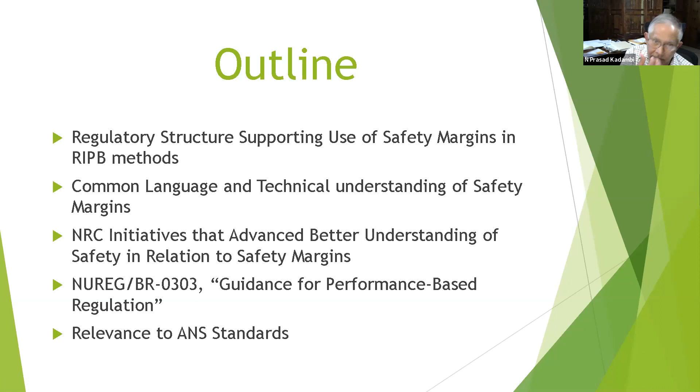So this slide essentially was presented by Stu Magruder of NRC staff, who made the community of practice presentation last month in April. And he offered this in the context of how the staff reviews applications for advanced reactor licensing, and how they use the RIPB methods, and what in the regulation makes that possible.

This excerpt clearly describes what NRC will be looking for in an application within the licensing process. Stu highlighted the need to include determination of margins of safety as a technology inclusive factor for evaluating applications. Now, 10 CFR 50.34(a) applies to PSARs, and therefore it can be seen as a minimum set of technical information to be provided in an application.

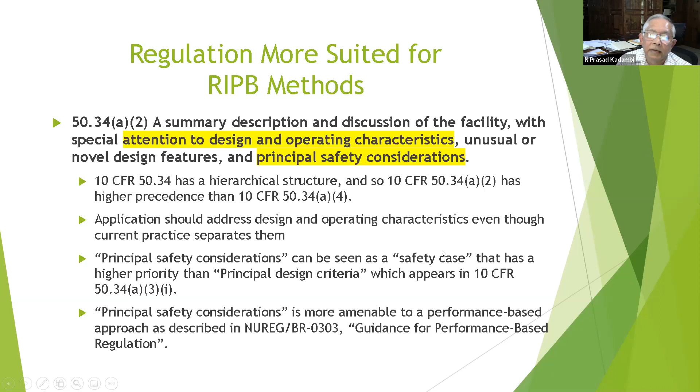So in terms of what does a designer do, the performance expectations associated with the design, I would expect that the designer will want to address the key regulatory expectations. And those would be based on analysis and evaluation of the design. And that includes functional analysis that covers design and operational phases. It would be based on modeling and simulation quite a bit.

The performance relative to risk would have to be considered. And these days, the way I look at it is that design and operation are to be considered in a continuum. But finally, we end up with being able to identify and determine the margins of safety. Next slide.

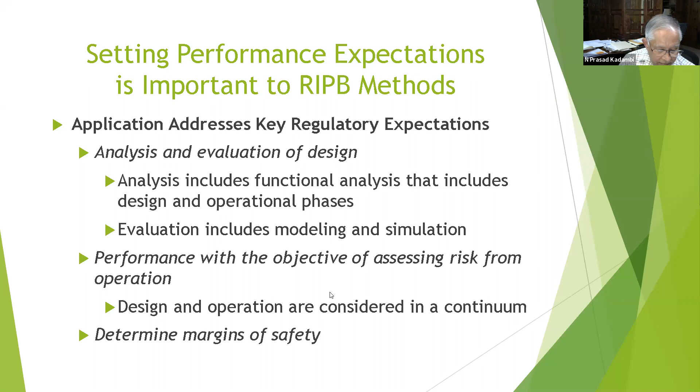So I'd like to spend a bit of time looking at the concepts of safety margin and margins in general. The common language understanding, the easiest to go to, would probably be profit margins, which are a difference between the sale price and the cost of manufacture. But as we all know, these things start off simple, but can become very complicated quickly.

For example, if you think about the posted speed limit on our roads, it's generally posted at about 55 miles an hour. But if you're traveling at 56 or 57, would you really get penalized for it? Highly unlikely. But what is involved is that there is a margin for enforcement of the speed limit. And generally these days, that's about 10 miles an hour. So if you go at 65 miles an hour, you can expect to get a ticket.

Similarly, it can get complicated if you don't consider margins and look at an issue that is frequently faced, especially in the past when the regulatory regime was more strictly compliance oriented: strict compliance with a requirement versus conformance with performance objectives.

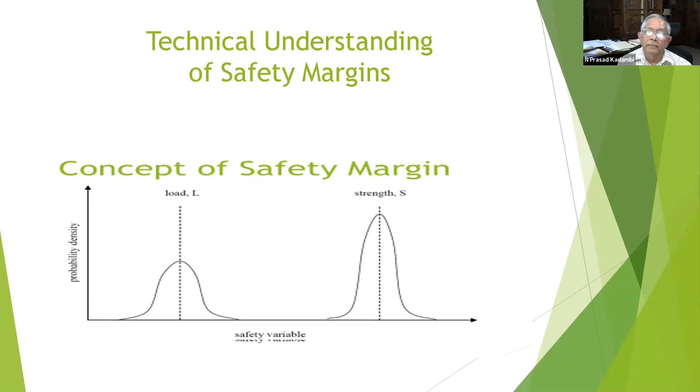If we look at the sort of issues that we face in the ANS standards, what we find is we're looking at, for example, things like reactor transients, in which there is an initiating event, and there's a trajectory for the transient, and what we are concerned about is what happens at the extreme points of the transient.

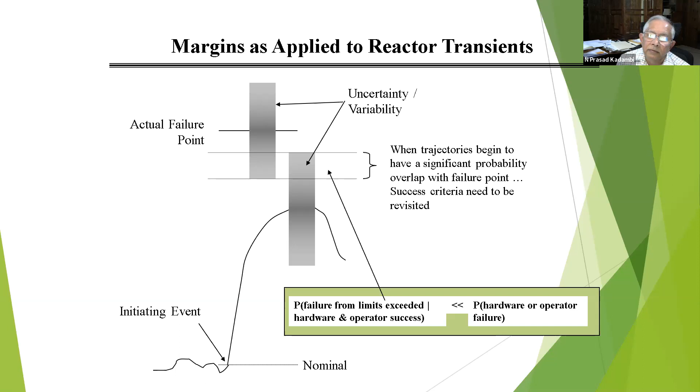And in this picture, what is shown is there's a probability distribution related to the variables in the transient. And of course, in terms of the margin, that probability distribution needs to be compared with a probability distribution associated with the failure. And it has to include consideration of the uncertainty and the variability of the parameters involved. So this is the sort of thing that makes margins quite complicated in some of the work that we do. Next slide.

So, a more sophisticated way of depicting margins was developed as part of the research that we did in the performance-based approaches area. I want to give credit to Bob Youngblood, who has worked with me over many years, and whose work I use liberally in this presentation also.

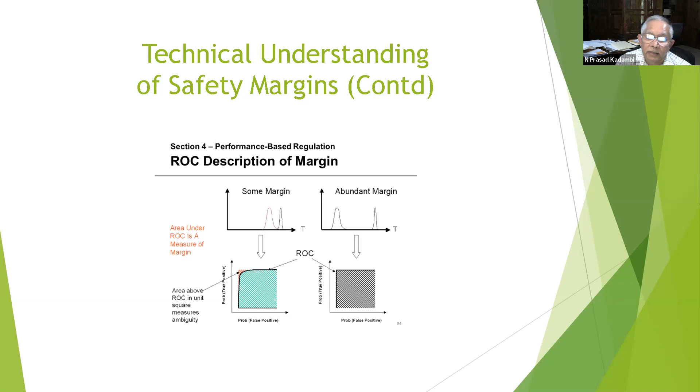He and I worked on this concept of the receiver operating characteristics, which is a way to show how decisions are made under uncertainty, but also ambiguity. So this is how practical decisions have to be made, where you have to consider margins. And this technique allows you to just pictorially represent where you have abundant margin and where you might just have some margin, but you don't know whether that's enough for what needs to be done. So that's where the evaluation comes in. Next slide.

Now, this is getting a little more into the details of how margins can be quite significant in the work that is done in reactor safety. This shows that there are conditions where the level of detail in the consideration of margins can become really quite significant. This picture depicts a set of events related to the large break LOCA that goes into the recirculation phase. And it's something that's associated with what has been called the generic issue 191 on debris accumulation.

The yellow part, the design basis, is where adequate cooling in the recirculation mode occurs. Now, in terms of how the modeling is used, it's the area where, related to margins, you would rigorously validate the margins. But if you start considering lower frequencies of the sequence, where you think about plugging and get into the beyond design basis region of the sequence, then it's just not practical to validate the models. So you have to deal with the fact that the margins you may be able to estimate, but you probably will have less confidence in the magnitude of the margin.

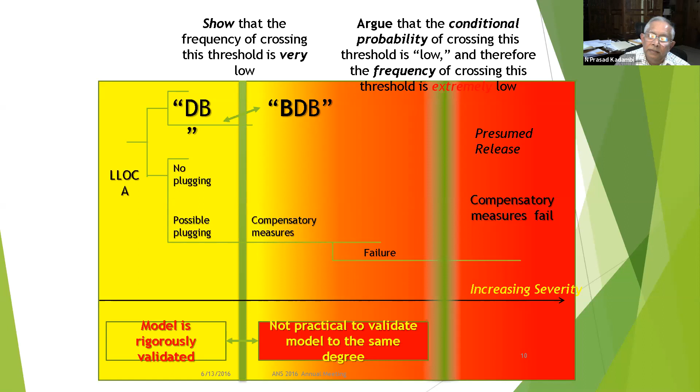So if you're able to determine the margins in a satisfactory way, then what becomes possible is that you have the possibility of a sort of negotiating between the allocation of margins for different uses. So this is where when people say that there should be flexibility in the regulatory regime, you're really talking about how the margins are allocated in such a way that the licensee has the ability to use the margin for their purposes, as much as the regulator has the need to use the margin to make sure that safety limits will be observed.

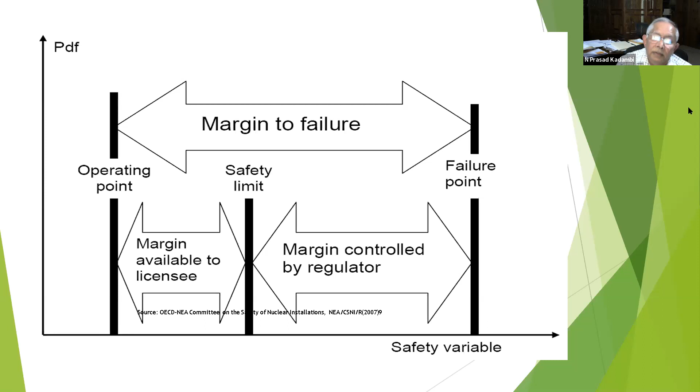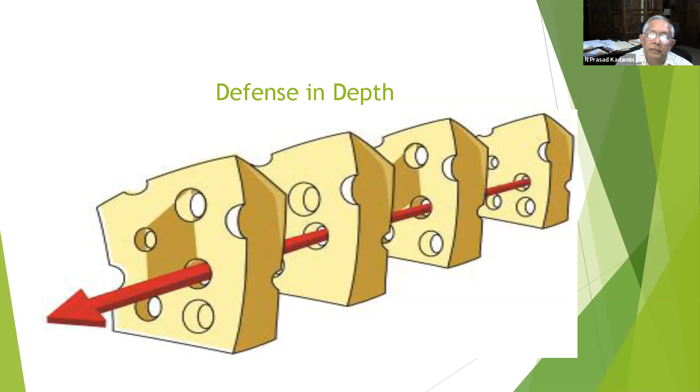Next slide. So, all this can come together in order to address the needs of defense in depth. And the way this picture addresses defense in depth is to say that you can view the layers of defense as like slabs of Swiss cheese with holes in it, and you will be able to determine vulnerabilities when the layers of defense somehow come together such that an event will bypass all the layers of defense that you have designed into it. So this one way of looking at the layers of defense that is proposed in the licensing modernization project is a search for vulnerabilities in this way. Next slide.

So now let's move into what were the commission initiatives that really made, in my mind, a lot of these things possible over the last 20 years. Now, we pay attention to what the commission says so that we can get the staff to focus on what matters. In some of these cases, the staff has a tendency to practice regulation in the way that it has happened in the past. But in my mind, what the commission did 20 years ago was quite revolutionary, and it was all part of what they call the strategic assessment and rebaselining.

As part of that, there was a direction setting issue 12 and some commission direction issued as a result of that. I've identified these references over there, but the sum total of all this was really reflected in what I think of as one of the most important documents around, and that is the white paper on risk-informed performance-based regulation. That's the SRM to SECY-98-144. Now, this was issued in 1999, and yet when I look at it, 10 CFR Part 52 was issued after this, and 10 CFR Part 52 doesn't really refer to the white paper or the risk-informed performance-based in any substantive way. It goes back to Part 50 for the technical requirements.

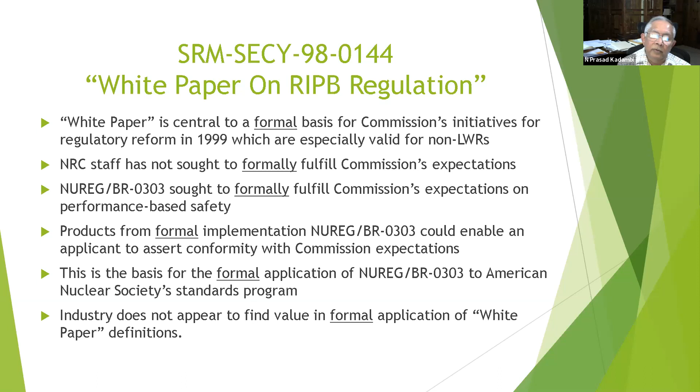So let's take a look at the white paper in a little more detail. The white paper offers, I think, a formal basis for implementing risk-informed performance-based approaches for new reactors, for advanced reactors. And what it also does is offer a basis for an applicant to assert that there's a formal basis for meeting and conforming with commission expectations. And this could be done in an analogous way to the way we use the Commission Safety Goal Policy Statement, or the Advanced Reactor Policy Statement, or the Severe Accident Policy Statement. So the point is that in the ANS standards program, we are trying to do these things, whereas it appears that industry is not finding much value in the white paper definitions. Next slide.

Let's see, is that the next one? Yeah, I think that's the next one. Okay, so

Success for RIPB methods then is to accomplish what actually matters. So the risk information is used as a way of grading the activities, and the performance-based approach provides the sound basis to show that performance objectives are being achieved. And this is done, as I said earlier, in the reactor oversight process quite well, and that's very successful.

Another point about the RIPB approaches is that unnecessary regulatory burdens can be revealed, and perverse incentives can be revealed, and system responses can be optimized, and inspection and tests can more directly support safety objectives. Next slide.

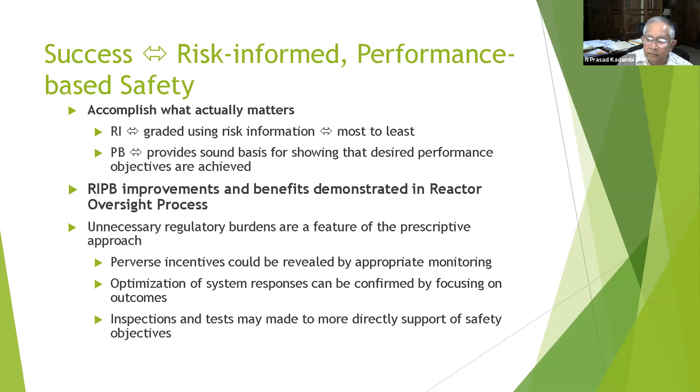So in terms of where NUREG/BR-0303 could be very helpful is that it could be used to propose alternatives in which we can look at how much prescriptive versus performance-based, how much do you need to rely on prescriptive methods in order to achieve the safety objective? And in general, the more margin you have, the less prescriptive you can be. And of course, between deterministic and risk-informed, depending on the magnitude and confidence in the margin, you can adjust the approach.

I think it is also very helpful to be able to do cost-benefit analysis in a more transparent way, and this could be very useful in applying a systems engineering approach and apply it again all the way from design to operation to decommissioning. So I think one other thing is that the current regulatory framework offers a lot of flexibility, but you need something like the performance-based approach formally applied in order to really take advantage of that flexibility.

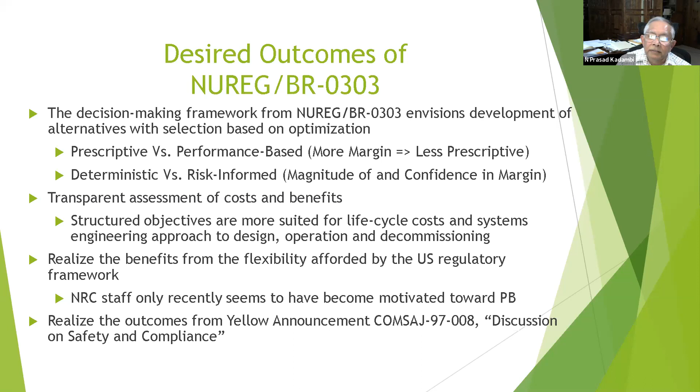So again, NUREG/BR-0303 offers, in terms of structured approach, something called the objectives hierarchy, in which you have the ability to consider where more prescriptive approaches would be appropriate, and where it is possible to use more performance-based approaches. Next slide.

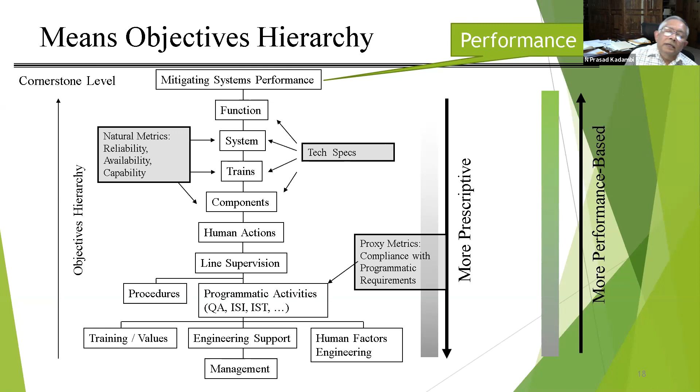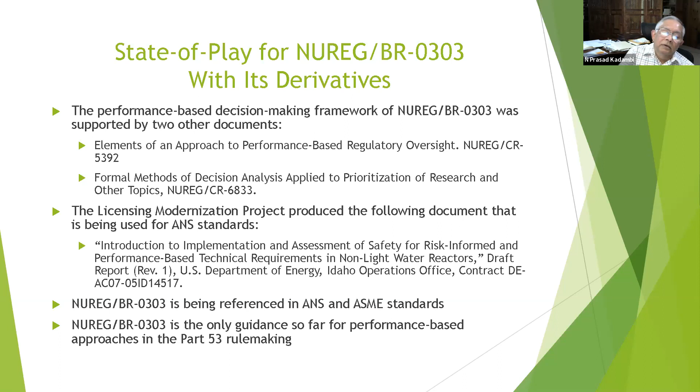So in terms of where we are with NUREG/BR-0303, there are a number of documents available that elaborate on some of the basic concepts in there. And I've shown those over here just for reference. And I also want to point out that there are standards, both ANS and ASME, that are using this guidance. And we have taken a role in the Part 53 rulemaking to suggest that there should be a role for NUREG/BR-0303 in that also. Next slide.

So in ANS standards, some of the things we are trying to do is RP3C is developing a guidance document, and in it, what we are incorporating is at a high level some of the lessons that come out of all this work that was done with risk-informed performance-based approaches, and make it available to the working groups that are actually developing standards.

Another thing that could be done is something that came out of the NRC Standards Forum last year. What we suggested there was that the way margins are dealt with in some of these standards is very inefficient and leads to basically very expensive applications. So if we consider margins as one of the ways of harmonizing standards, it could result in a more efficient way of using consensus standards.

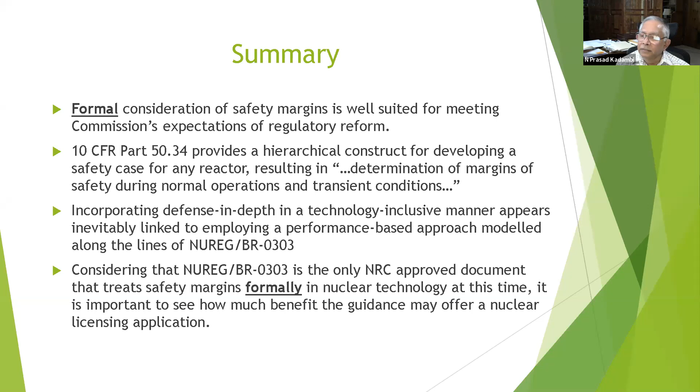Incorporating defense in depth in a technology inclusive manner appears inevitably to involve performance-based approaches, and a formal way of doing that would be NUREG/BR-0303. And considering that NUREG/BR-0303 is the only NRC approved document that treats safety margins formally in nuclear technology at this time, I think it is important to see how much benefit this guidance may offer within the nuclear licensing process. So that is my presentation, and I'd like to see if there are any questions.

I see that Tim has offered a reference for the structuralist versus rationalist view. Thank you very much, Tim. We'll make sure that that's part of the record of this session.

And Tom Nicholson, thanks, Tom, for joining us. Please comment on the new USNRC Be Risk Smart initiative. Okay. Well, Tom, I guess I don't know enough about that to comment on it right now. Would you like to tell us something about how that is relevant to what we are talking about today?

Yes, I'd be more than happy to comment. The NRC is involved in creating initiatives for transformation. And one of the things we want to do is across the board, not just for licensing actions, but for all actions, to be risk smart. And the issue basically comes down to getting risk-informed insights into the work we do, whether it be in research and licensing and nuclear power plant protection.

So it follows similar to the risk-informed approach that you were talking in the past, which focused on safety margins and on safety considerations. But now we're looking across the board: environmental reviews, safety reviews, security reviews, all kinds of issues. So it's formulating a whole new thought pattern for the NRC staff.

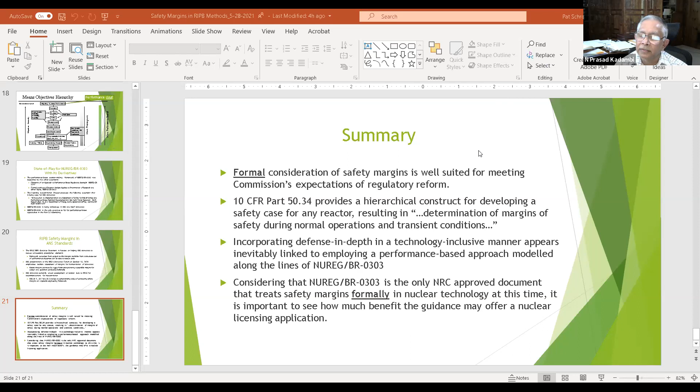Well, my response would be that what we are looking for is a better way of making decisions about safety. And I'm suggesting that rather than get into some of these processes of model development and validation, where so much is done about the validation, the end point of it, I think, always has to be how confident are you about the margins that you estimate. So this is the magnitude and confidence of the margins which will feed really the decision-making process.

So I think something like this Reg Guide 1.203 will probably be a good basis for the process involved in estimating the variables associated with specific safety decisions. Just off the top of my head, that's the way I see it. But that is the reason why I think modeling and simulation is such an important part, because we are talking about advanced reactors where we don't really have much operating experience.

But our ability to model these days is just so good that we should be able to make better use of it to estimate the margins and then prove it as part of the licensing process, which is, you can build a facility and have license conditions that are based on demonstrating that the predicted margins are being realized. And I think that would be a perfectly sound way of making the kinds of decisions that licensees and NRC would find beneficial.